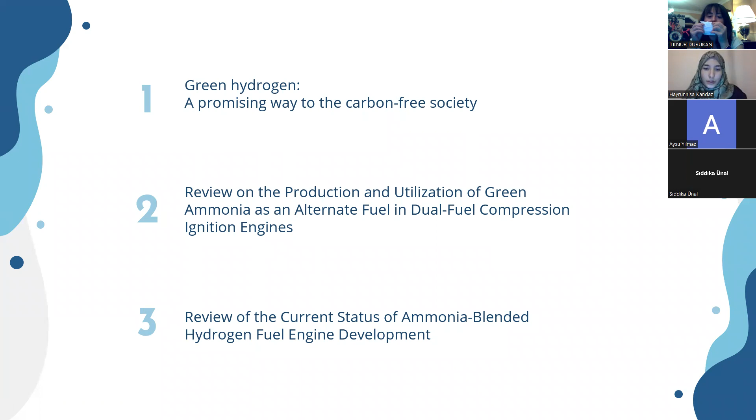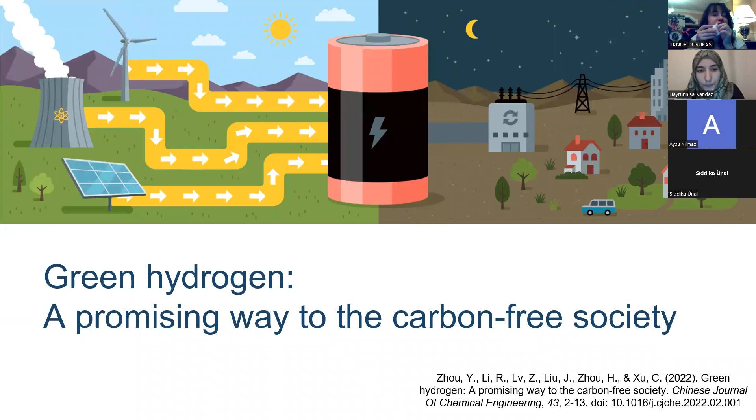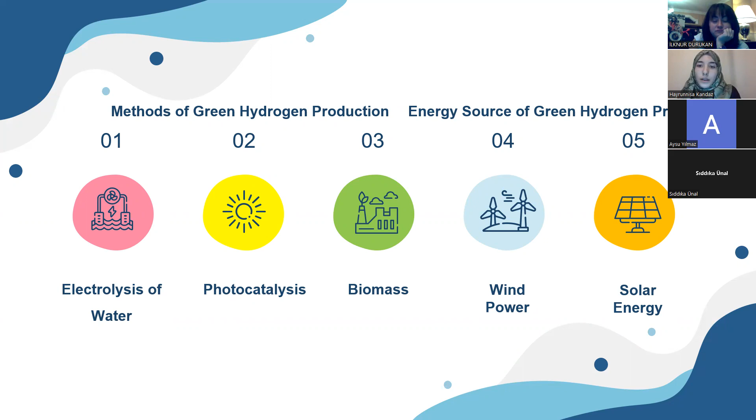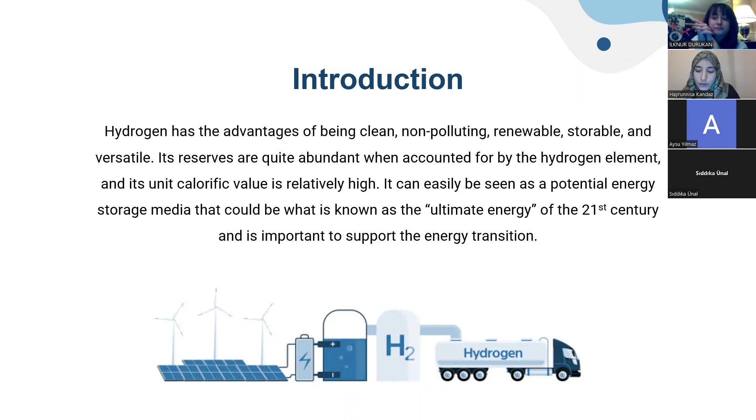We begin with green hydrogen, a promising way to the carbon-free society article. Green hydrogen production methods include electrolysis of water, photocatalysis, and biomass. The energy source of green hydrogen production is mainly wind power and solar energy. Hydrogen has the advantages of being clean, non-polluting, renewable, storable, and versatile. Its reserves are quite abundant when accounted for by the hydrogen element, and its unit calorific value is relatively high. It can easily be seen as a potential energy storage media that could be what is known as the ultimate energy of the 21st century, and it's important to support the energy transition. In view of the different hydrogen production pathways, hydrogen source can be divided into gray hydrogen, blue hydrogen, and green hydrogen.

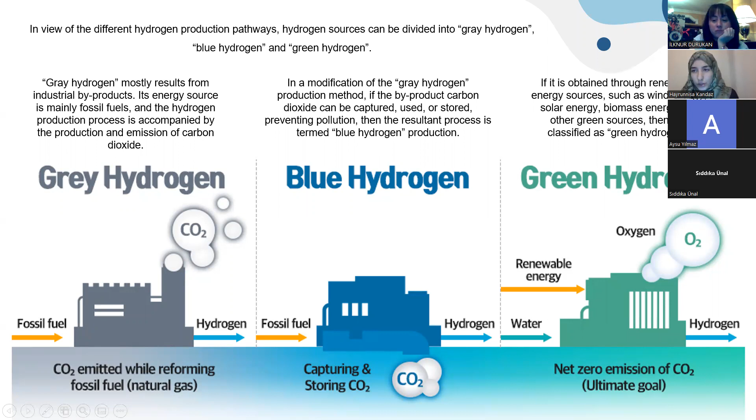Gray hydrogen mostly results from industrial byproducts. Its energy source is mainly fossil fuels, and the hydrogen production process is accompanied by the production and emission of carbon dioxide. In a modification of the gray hydrogen production method, if the byproduct carbon dioxide can be captured, used, or stored, preventing pollution, then the resultant process is termed blue hydrogen production. If it's obtained through renewable energy sources such as wind energy, solar energy, biomass energy, and other green sources, then it's classified as green hydrogen. The electricity in the electrolysis process has great potential to be driven by renewable energy and obtained through low carbon or carbon-free methods. Therefore, this technology is considered to be the most promising green hydrogen production technology.

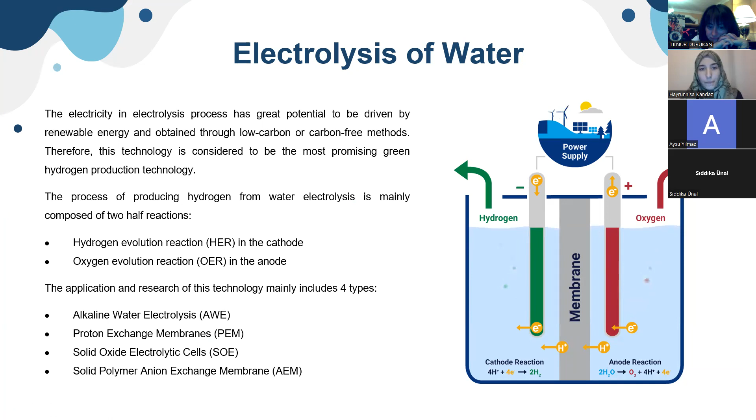The process of producing hydrogen from water electrolysis is mainly composed of 2 half reactions: the hydrogen evolution reaction at the cathode, as you can see in the figure, and the oxygen evolution reaction at the anode. The application and research of this technology mainly includes 4 types: alkaline water electrolysis, proton exchange membranes, solid oxide electrolytic cells, and solid polymer anion exchange membrane. Let's take a look at these types of technologies and their differences in a video.

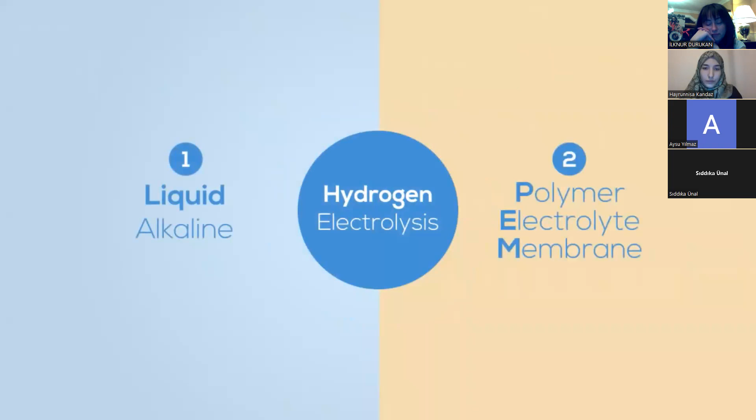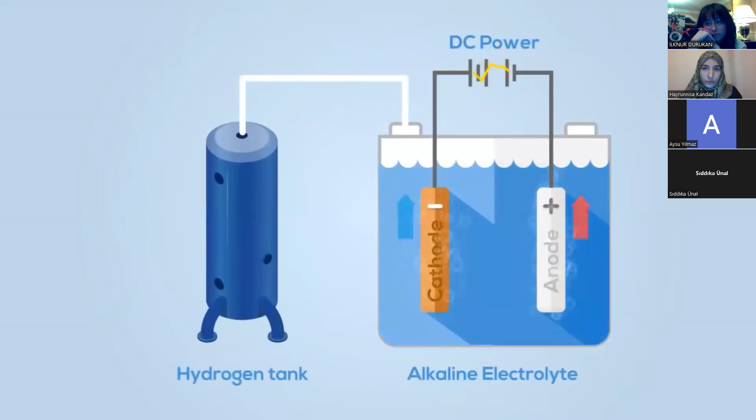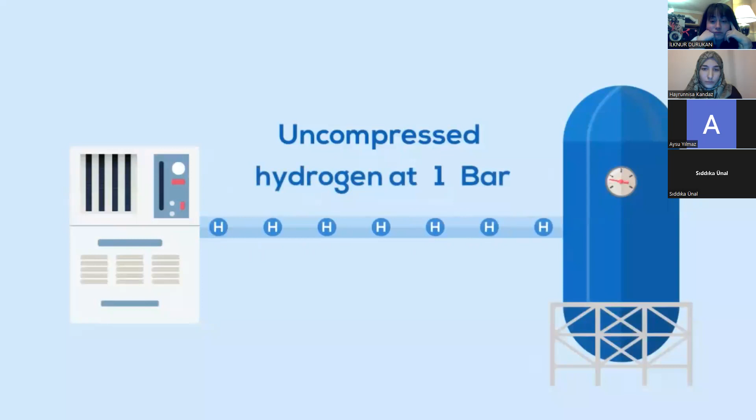Hydrogen electrolysis from water is usually undertaken with liquid alkaline or polymer electrolyte membrane electrolyzers. The alkaline electrolyzer works by immersing 2 electrodes in a liquid electrolyte. When a voltage is applied, the product gases are released, in this case oxygen and hydrogen. However, it does pose some problems. It is unable to make efficient use of intermittent power supplies, meaning it's incompatible with renewables. It also compromises efficiency during storage. To store enough hydrogen for regular use, you would need either a giant tank or an additional compressor.

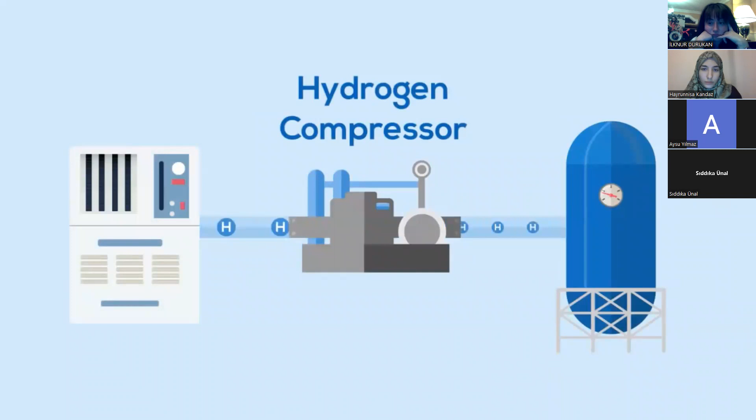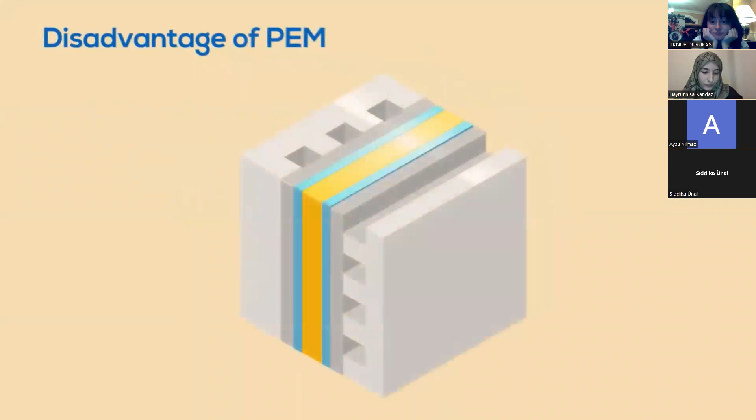The PEM electrolyzer overcomes some of these issues by using a solid polymer electrolyte, which is the membrane responsible for the conduction of protons, the separation of hydrogen and oxygen, and the electrical insulation of the electrodes. It's able to make use of the fluctuating power supply from renewables and results in pure hydrogen due to the solid structure of the electrolyte. It is easy and more efficient. However, it has a prohibitively high cost due to its required use of gold, iridium, and platinum.

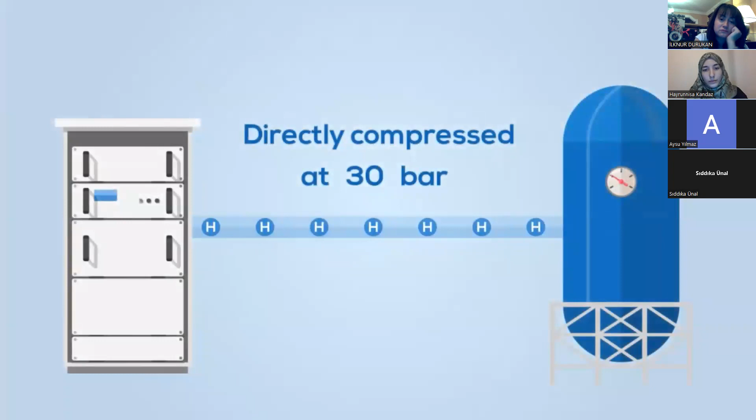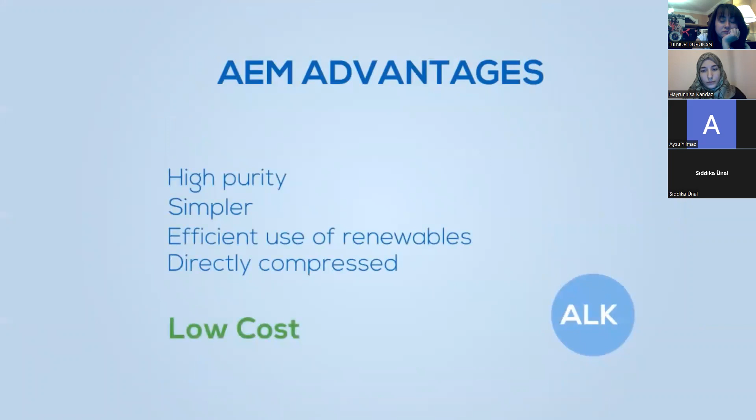Fortunately, a new type of electrolyzer, the anion exchange membrane, or AEM electrolyzer, provides a solution to all of these problems. It uses an alkaline solid polymeric membrane, eliminating the need for rare and expensive noble metal catalysts. The AEM electrolyzer is a simpler and more efficient system that produces directly compressed hydrogen. It's the key technology that enables lower overall costs. The AEM electrolyzer combines the benefits of the PEM electrolyzer with the cost of an alkaline system. It's an important breakthrough which will enable the economical adoption of hydrogen energy storage systems all over the world.

Then let's look in detail at all of the electrolysis methods. First, we begin with alkaline water electrolysis. The AWE technology covers the earliest industrialization time, reliable technology, low cost, and easy operation, but the device occupies a large area. At present, the device for alkaline water electrolysis technology is mainly composed of an electrolyzer, electrolyte, diaphragm, cathode, and anode. Diaphragm means membrane. Generally it has a low working temperature, and the diaphragm is generally made of asbestos. It is necessary to balance the pressure of the cathode and anode during operation to avoid explosion caused by the interpenetration of hydrogen or oxygen.

Since the electrolyzer for alkaline water electrolysis is slow to start and requires long response time, we see in the video that the method of increasing the conversion rate can be achieved by increasing the current intensity or reducing the voltage.

In AWE technology, the choice of electrolyte and the quality of the diaphragm have a decisive influence on the efficiency of hydrogen production. The effect of electrolyte concentration on the electrolysis efficiency is significant.

In the development process, asbestos, which was used as a diaphragm in the early stage, was replaced due to its poor corrosion resistance.

Composite diaphragms formed by the cross-linking of high molecular polymers and specific inorganic materials have already been developed. However, they still need to be optimized.

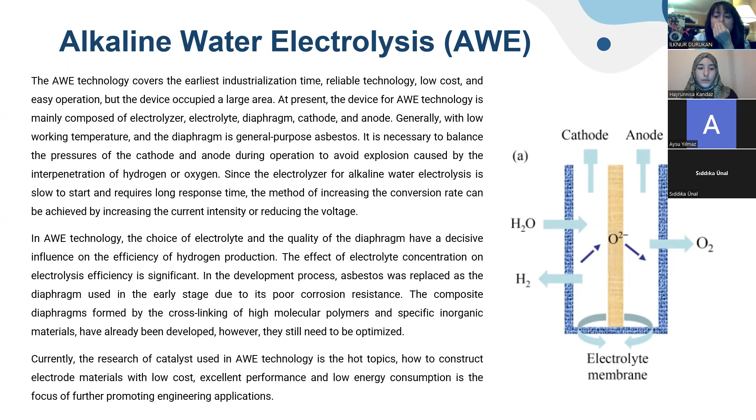Currently, the research of catalysts used in AWE technology is a hot topic: how to construct electrode materials with low cost, excellent performance, and low energy consumption is the focus of further promoting engineering applications.

AWE technology has been widely used in industries such as pharmaceuticals, energy storage, and metallurgy. These processes are represented by some research and development institutions.

Some countries are most important for research and development, such as China, America, Norway, Belgium, and Italy.

Proton exchange membrane, PEM, technology is easy to integrate and has high conversion efficiency, but the cost is very high. The catalyst cost is one of the big reasons preventing this technology from being applied at large scale.

Due to the small size of the electrolytic cell, it is easy to couple PEM with wind energy and photovoltaics, so this technology is applicable in the future.

For PEM technology, the main device is still an electrolytic cell, but the core part becomes a polymer cation exchange membrane. The cathode and anode catalysts are attached to this membrane, and the bipolar plate is responsible for the connection of multiple membrane electrodes.

The advantage of PEM technology is that it can achieve single conductivity of hydrogen ions, giving it higher safety. In addition, the construction of the electrolytic cell is compact and the electrode does not corrode the device.

The research focused on the influence of different proton exchange membranes on the performance of the PEM electrolytic cell and the development of new membrane materials.

The development of PEM technology originated from the needs of US military oxygen generators. Because of the problem of consuming renewable energy, European and American countries are actively promoting the advancement of the PEM process.

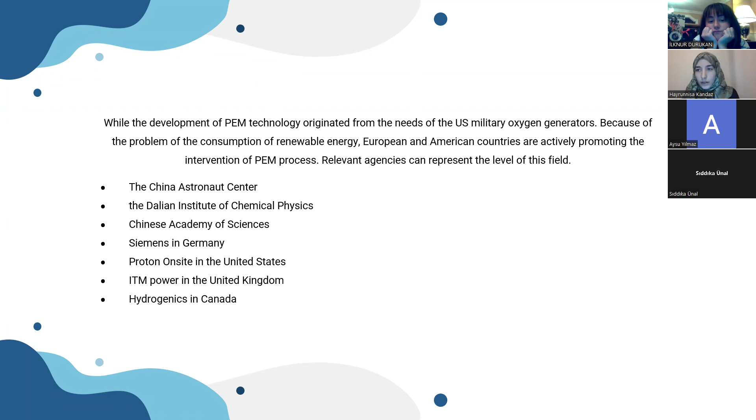Solid oxide electrolytic cell, SOE, technology is subject to certain restrictions due to the high temperature required as the working condition. The SOE technology requires a high temperature reaction site.

A nickel-based porous cermet is used as the cathode, and the anode is a perovskite oxide of rare earth elements, while the electrolyte layer usually acts as an oxygen ion conductor.

Due to the high operation temperature, the standard for the materials of the internal devices is relatively high. SOE technology has the advantage of flexible coupling with renewable energy.

Some institutions have carried out the optimization of solid oxide stacks and the design and operation of high temperature electrolytic cells. For SOE technology, in addition to stability under high temperature conditions, the anode material also needs to have compatibility with the electrolyte material.

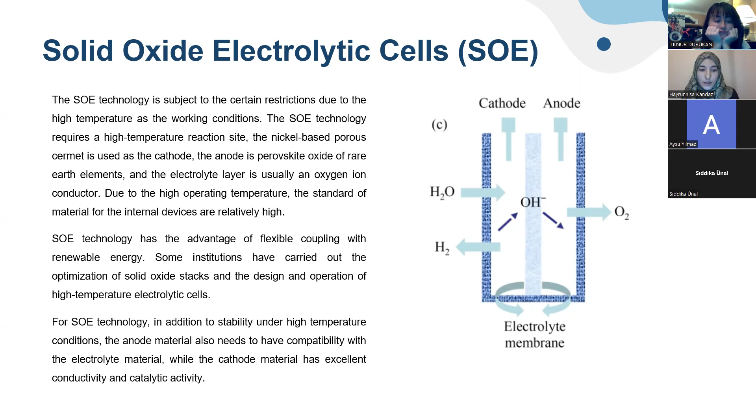The cathode material also needs excellent conductivity and catalytic activity.

This process is represented by some research and development institutions in the United States, Germany, France, and China.

After a series of research, the current problems that need to be solved in this technology mainly concern the poisoning of electrode materials and the high internal resistance in its long-term operation.

Solid polymer anion exchange membrane, AEM, technology is still in the research phase in terms of high temperature working conditions. The AEM technology uses an anion exchange membrane with low working temperature, fast startup, and non-corrosive reaction medium.

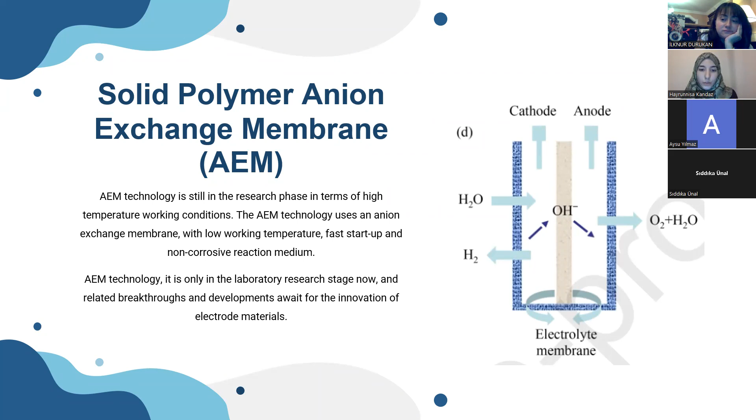AEM technology is only in the laboratory research stage now, and related breakthroughs and developments await the innovation of the electrode materials.

Regarding the operating parameters of the technologies, we can see the four technologies compared by electrolyte membrane, current density, required temperature, hydrogen purity, relative equipment volume, operating characteristics, maintainability, environmental protection, and technology maturity.

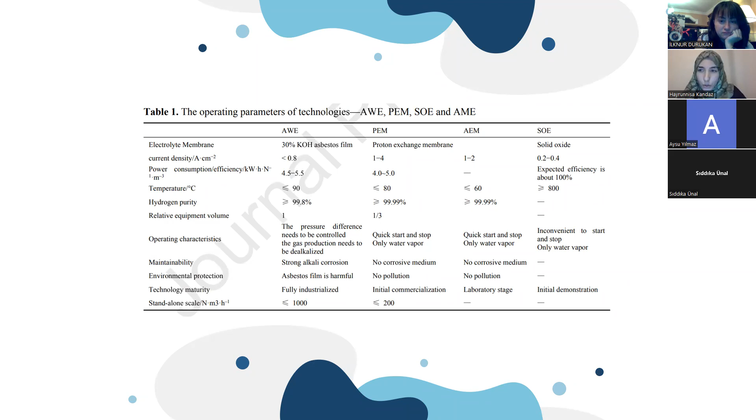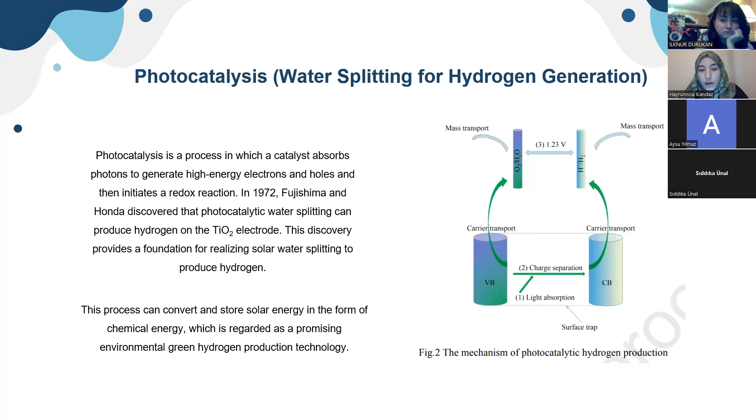Photocatalysis: water splitting for hydrogen generation. Photocatalysis is a process in which a catalyst absorbs photons to generate high energy electrons and holes and then initiates a redox reaction. In 1972, Fujishima and Honda discovered that photocatalytic water splitting can produce hydrogen on a titanium oxide electrode. This discovery provides a foundation for realizing solar water splitting to produce hydrogen. This process can convert and store solar energy in the form of chemical energy, which is regarded as a promising environmental green hydrogen production technology.

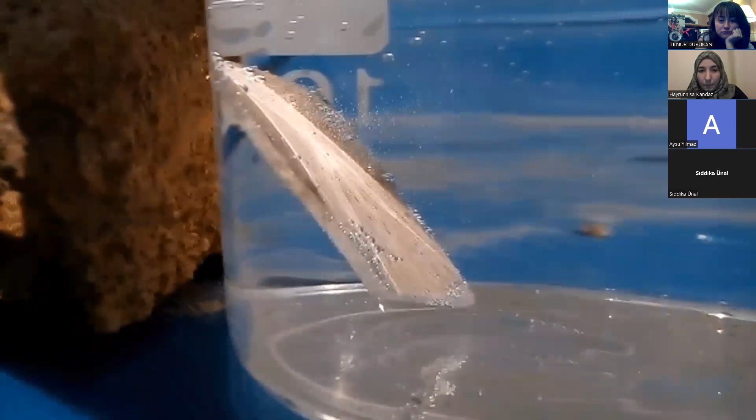Korean researchers have developed a catalyst system that can increase efficiency and reduce the cost of hydrogen production. Let's watch this news about how Korean materials scientists developed a new material to produce hydrogen by the photocatalytic method in 2019.

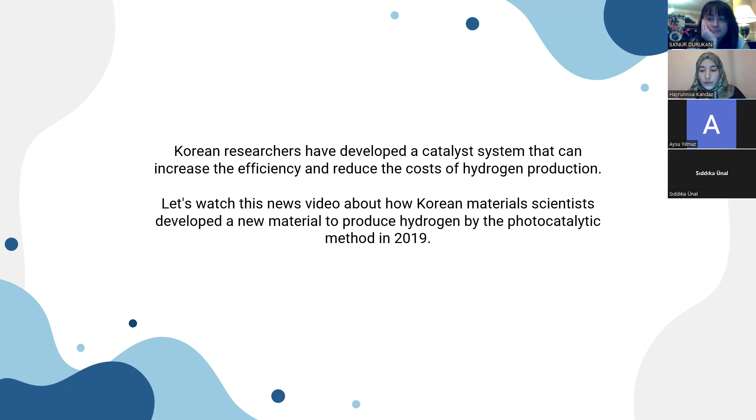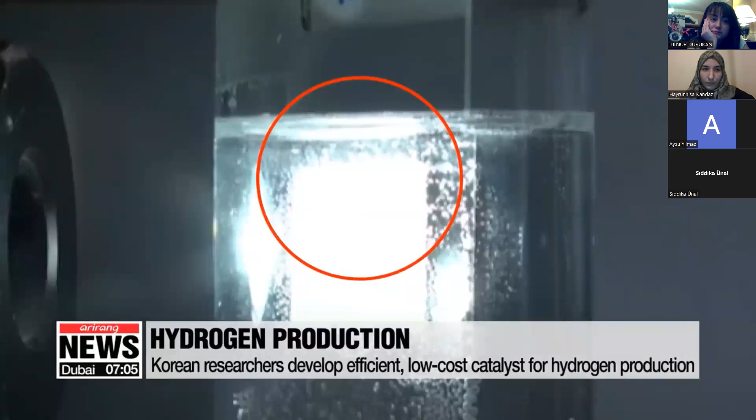Shining light at the beaker of water creates tiny bubbles. The film-like solid catalyst developed by Korean researchers uses regular light to convert water into hydrogen. The catalyst turns black during the reaction and then returns to its original white color, which means it can be reused multiple times.

We observed that hydrogen was created for a period of 48 hours in light. Hydrogen output stayed the same, so we believe the technology can be used for a long time without the catalyst losing performance. Under good lighting, a gram of the material used in the catalyst can create 30 milligrams of hydrogen per hour. The new catalyst is 50% more efficient than existing systems.

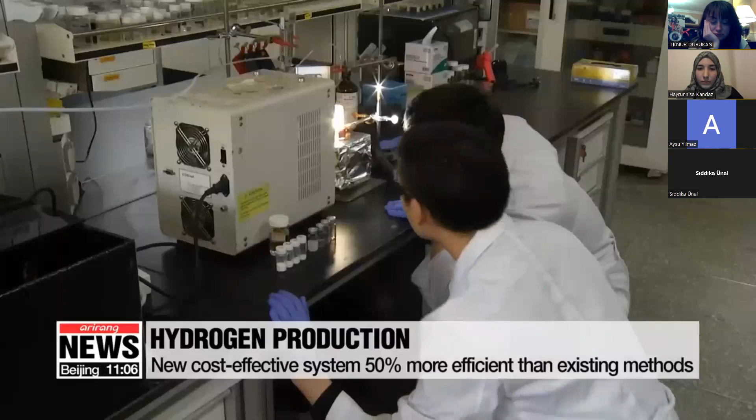And because it's made of copper instead of expensive platinum, it's much more cost-effective. Also, retrieving hydrogen from water using light does not produce any harmful byproducts.

At present, most hydrogen is made through a methane reformation technique. This is energy intensive and generates a lot of byproducts like greenhouse gases. The new technology only produces hydrogen.

Biomass. Using biomass as raw material through gasification, conversion, decarbonization, and separation, pure hydrogen is obtained finally. Because in green hydrogen production, storage and transportation occupy a high proportion, which is the main obstacle to opening up green hydrogen energy in the energy system. Hydrogen production by biomass is expected to overcome these two major problems: storage and transportation problems of green hydrogen sources, and hydrogen storage and transportation cost.

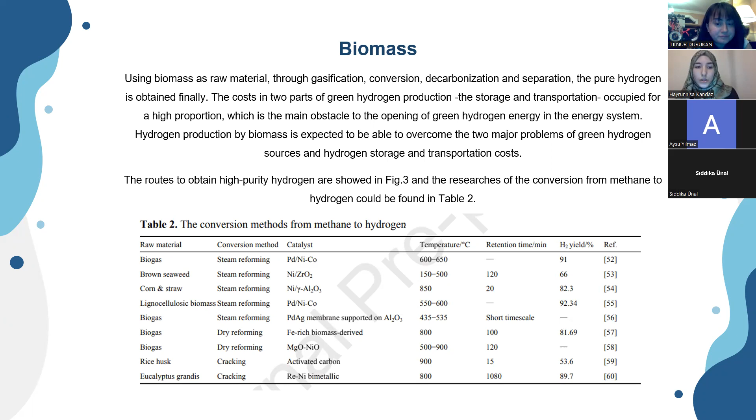The routes to obtain high purity hydrogen are shown in figure 3, and this research on the conversion from methane to hydrogen could be found in table 2. You can see the conversion methods from methane to hydrogen, and we see in the figure, biomass feedstock.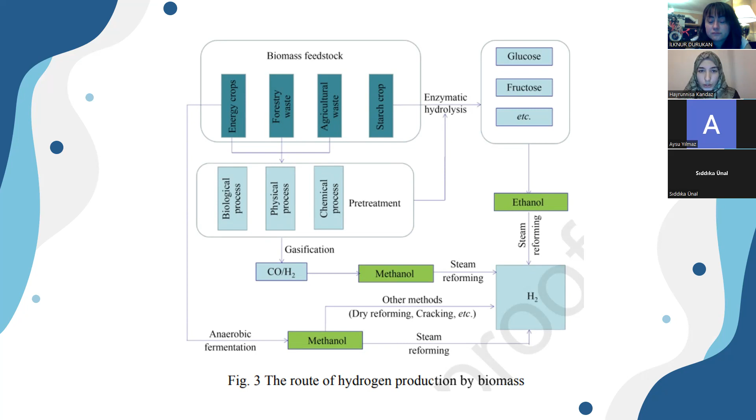Biological hydrogen production and thermochemical hydrogen production are two pathways for hydrogen production by biomass. Biological ways show hydrogen-producing microorganisms such as anaerobic fermentation hydrogen production and photosynthetic hydrogen production, but the yield and stability are poor, and the possibility of large-scale production is limited.

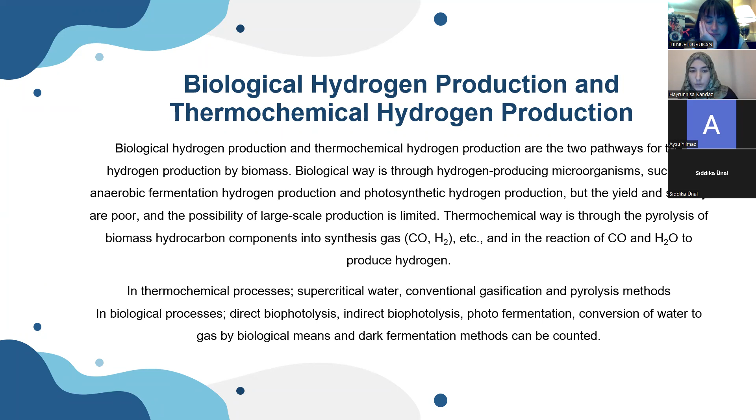Thermochemical ways show the pyrolysis of biomass hydrocarbon components into synthesis gas, carbon monoxide, and hydrogen, and in the reaction of carbon monoxide and water, hydrogen is produced. In thermochemical processes, supercritical water gasification, conventional gasification, and pyrolysis methods are used. In biological processes, direct biophotolysis, indirect biophotolysis, photofermentation, conversion of water to gas by biological means, and dark fermentation methods can be counted.

Supercritical water gasification uses the dissolving ability of supercritical water to dissolve various organic substances in biomass to produce a high density, low viscosity liquid, which could be quickly vaporized under high temperature and high pressure conditions to produce mixed gas rich in hydrogen.

Compared with other biomass thermochemical hydrogen production technologies, supercritical water gasification has unique advantages. Without a high energy consuming drying process, it can directly gasify wet organisms with high water content and will not cause secondary pollution. In addition, the heat from the produced high pressure hydrogen can be directly used for combustion engines or turbines to obtain electricity.

Although supercritical water gasification is a promising biomass fuel conversion technology, the application of this technology on an industrial scale still has some limitations. On one hand, currently only a few researchers have the opportunity to use short residence time continuous flow tube reactors or continuous stirred tank reactors for supercritical water gasification experiments. On the other hand, current research hotspots on supercritical water gasification hydrogen production technology mainly focus on the influence of different types of biomass compounds on hydrogen production yield.

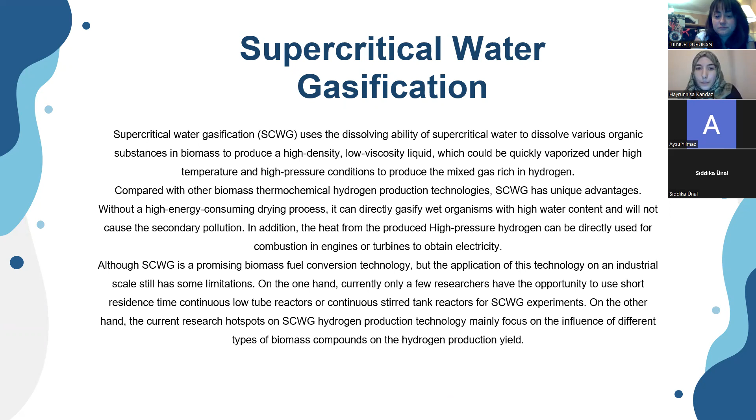Since the carbon dioxide that comes out as a result of burning organic materials was previously taken from the atmosphere during the formation of these materials, the environment will be protected in terms of carbon dioxide emissions during the production of energy from biomass.

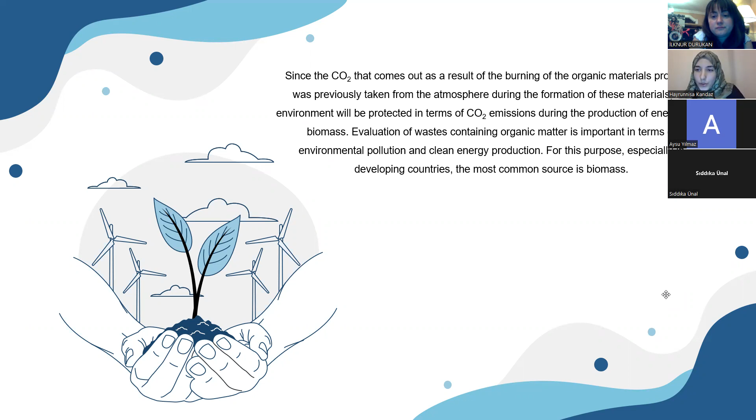Evaluation of wastes containing organic matter is important in terms of environmental pollution and clean energy production. For this purpose, especially in developing countries, the most common source is biomass. Approximately 15% of world energy consumption and 43% of energy consumption in developing countries are provided from biomass.

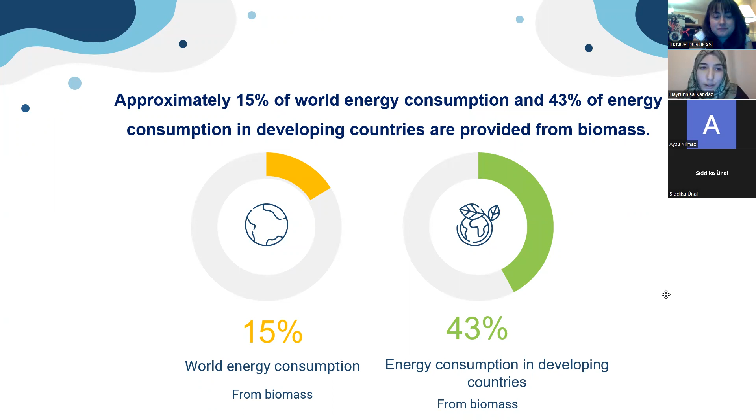Energy source of green hydrogen production: wind power. The hydrogen production project by wind power was first proposed by the United States, which produced hydrogen through a generator connected to an electrolysis reactor. The National Renewable Energy Laboratory in the US and Xcel Energy launched the wind-to-hydrogen demonstration project in 2004, which uses wind power and photovoltaic power to produce and store hydrogen, maximizing the use of renewable energy and optimizing the energy transfer. After the US, Japan also proposed a series of plans and applications for hydrogen production from wind power.

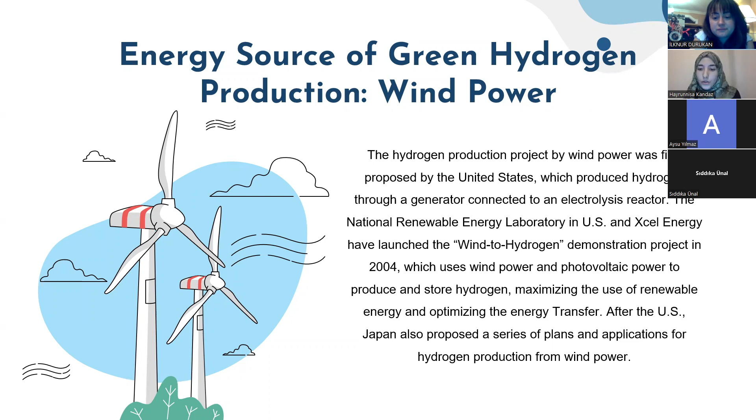Green hydrogen is produced using renewable energy in this project. In recent years, there has been a lot of theoretical and technical research on hydrogen production technology by wind power generation. For example, a coordinated control method is developed for hydrogen production technology by wind power generation, in which variable speed wind turbines and hydrogen production devices are installed together. The power curve is smoothed to reduce the impact of wind energy fluctuations on the power system and hydrogen production equipment. After that, the system is introduced and simulated in detail, and its performance is evaluated.

The influence of the operating temperature of the electrolyzer on the hydrogen production system in wind power generation was analyzed. The production efficiency at the actual working temperature is compared with the production efficiency at the rated temperature, and the result shows that the hydrogen production efficiency at the actual temperature is overestimated. A wind power plant for hydrogen production by electrolyzers was simulated, and two methods were proposed for optimizing the total power of hydrogen production by wind power. The coupled operation of electrolyzer and wind turbines was studied, comparing the operating performance of four types of electrolyzer.

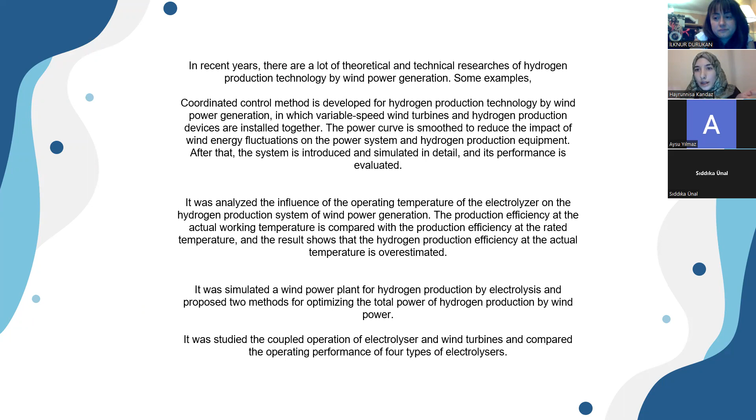Wind power is one of the ways of green hydrogen production technology. Wind energy is converted into electrical energy through wind generators, and then hydrogen is produced by electrolysis of water and passed through the hydrogen transmission system to achieve the terminal utilization, completing the wind energy converting to hydrogen energy.

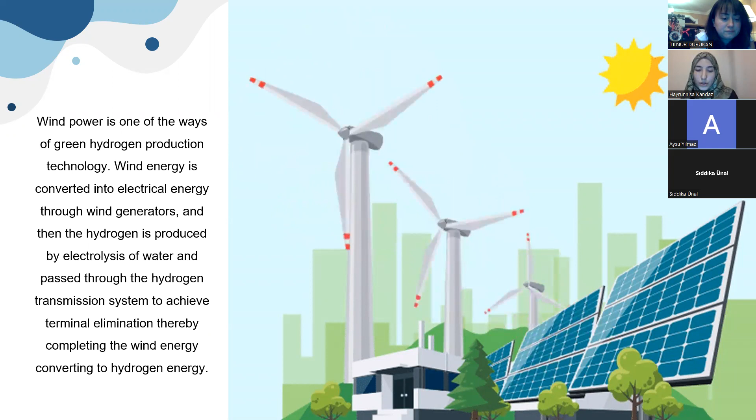According to the way of connecting to the grid, hydrogen production technology can be divided into three types. The grid connection system connects wind turbines to the grid, obtains electricity from the grid, and produces hydrogen by electrolyzing water. This method is mainly used for wind consumption and energy storage of large-scale wind sites, with routes shown in figure 4. For off-grid systems, the electrical energy is produced by a single fan or multiple fans, which is directly provided to the electrolysis equipment without going through the grid for hydrogen production.

The grid-connected without transmission system is the way to connect the wind turbines with the grid, but the electricity is not transmitted to other sites, only meeting the demand for hydrogen production locally.

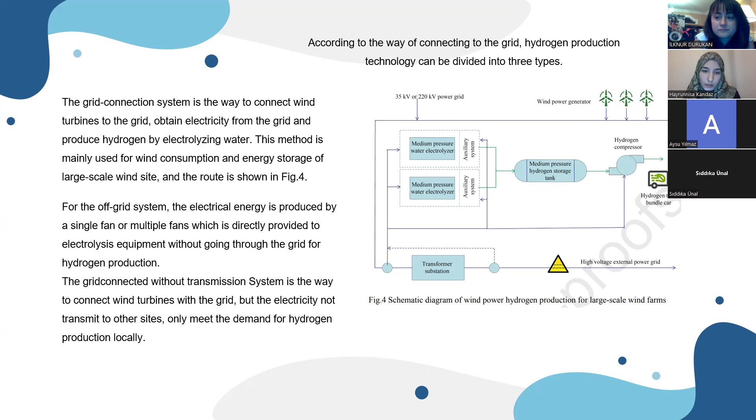Energy source of green hydrogen production, wind power, Table 3. Table 3 shows the economic data of hydrogen production using wind power as the energy source. The survey from different countries shows that it's economically feasible to use wind energy to generate hydrogen to a certain degree.

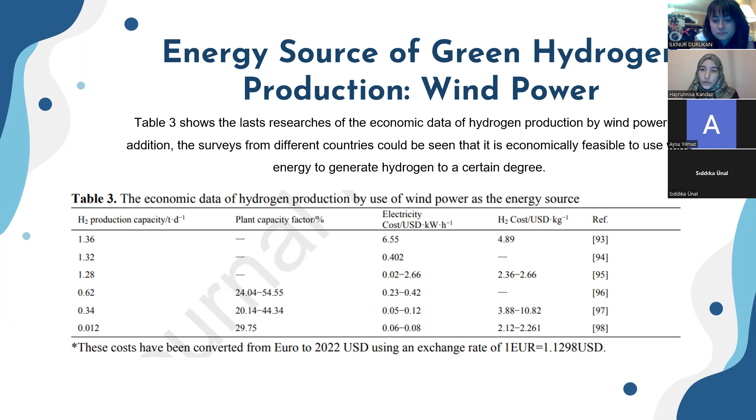Solar energy. The solar hydrogen production system by photovoltaic-water electrolysis can be divided into direct coupling and indirect connection according to the connection mode between the solar photovoltaic panel and the water electrolysis cell. The direct coupling system is achieved through optimal structure matching between the photovoltaic array and the water electrolyzer, without the maximum power point tracking controller, direct current controller, and storage battery, etc., making the system more economical and efficient.

Indirect connection is the method used by most photovoltaic water electrolyzer hydrogen production systems, which is composed of photovoltaic modules, control modules, batteries, and a hydrogen energy storage system. Because the system requires electronic equipment such as MPPT and DC-DC controllers, it not only increases the system cost, but also causes power transmission loss, reducing system efficiency.

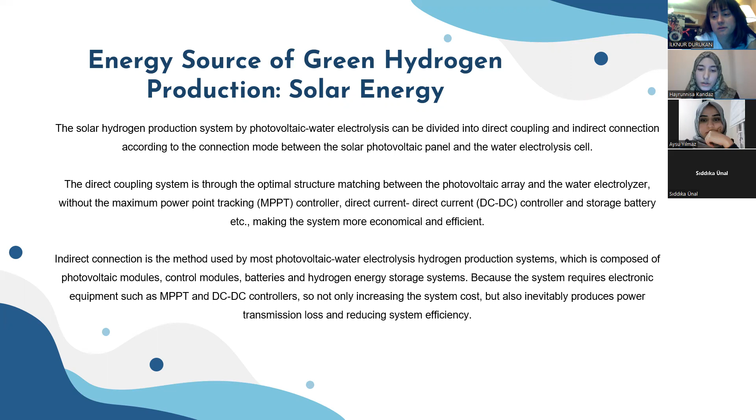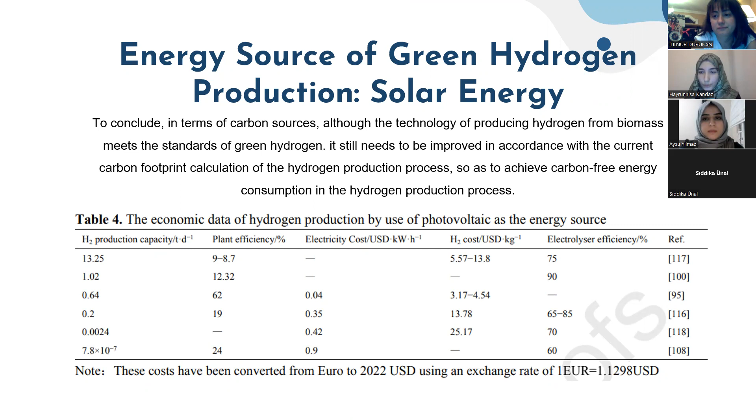To conclude, in terms of carbon sources, although the technology of producing hydrogen from biomass meets the standards of green hydrogen, it still needs to be improved in accordance with the current carbon footprint calculation of the hydrogen production process, so as to achieve carbon-free energy consumption in the hydrogen production process. You can see the economic data of hydrogen production by use of photovoltaic as the energy source, and their efficiency also, and their costs.

Conclusion. In the current global energy strategy, the green hydrogen industry is crucial in the development of low-carbon energy. The cost of hydrogen production from traditional fossil energy will gradually rise with the increase of carbon tax and discouragement of the carbon emissions, while the cost of green hydrogen obtained from renewable energy will also gradually decrease with the improvement of technology and the industry in this side.

At present, the most promising hydrogen production technology involves the electrolysis of water. In addition, hydrogen production fueled by renewable energy, wind and solar energy, and biomass are also potential approaches in the zero carbon pathway.

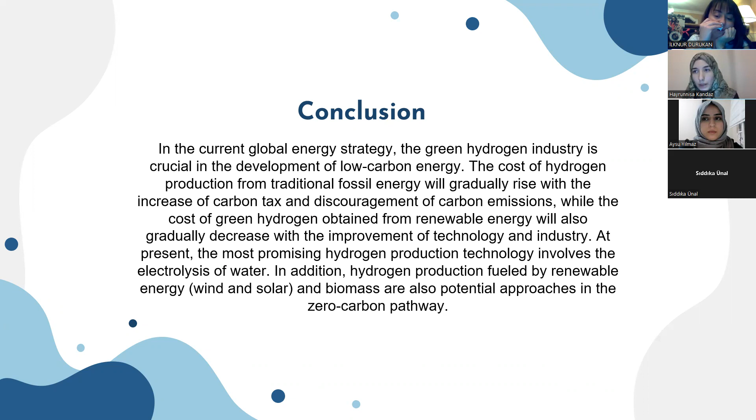Review on the production and utilization of green ammonia as an alternate fuel in dual-fuel compression ignition engines. Prospects for hydrogen, a carbonless fuel, face limitations in developing the necessary infrastructure as well as challenges associated with its storage and distribution. Ammonia has been identified as a potential facilitator for a well-established carbon-neutral economy and can also serve as a hydrogen energy carrier thanks to its higher gravimetric hydrogen density.

This article provides a detailed literature review highlighting the challenges and strategies for using ammonia as a fuel for compression ignition engines in dual-fuel combustion mode with secondary fuels such as diesel, dimethyl ether, kerosene, hydrogen, and other alternative fuels.

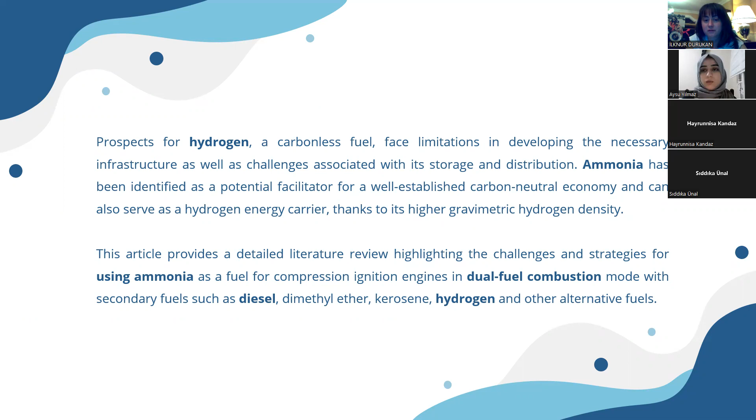Introduction. Hydrogen has been recognized as one of the most promising clean energy carriers that are sustainable and have the potential to contribute to the decarbonization of the automotive and power generation industries. However, the direct use of hydrogen as a transportation fuel faces several safety and storage challenges due to its physicochemical properties such as its boiling point and flammability range.

Liquid hydrogen storage systems using cryogenic tanks are an alternative technique for storing hydrogen under ambient pressure conditions, but the low energy efficiency of the liquefaction process and boiling of hydrogen from cryogenic containers limit the application of this storage method.

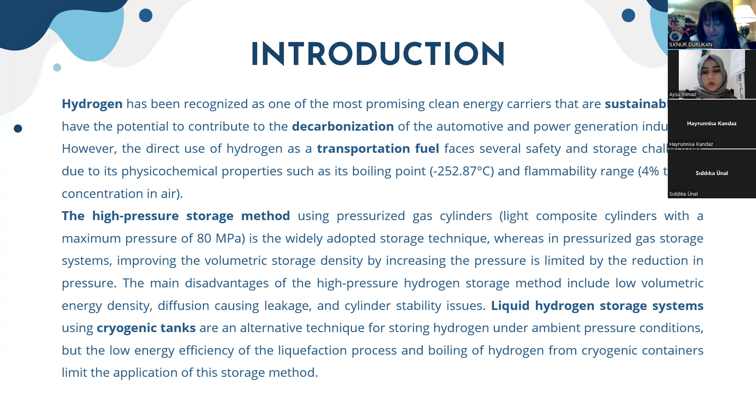The difficulties associated with the storage and transportation of hydrogen due to its low density can be overcome using hydrogen energy carriers such as ammonia and brown gas, whose indirect use is highly energy efficient compared to liquid or compressed hydrogen at high pressure. Ammonia is a carbonless fuel with a hydrogen content of 17.6% by weight and can be stored at 25 degrees. Ammonia also has an established production and distribution network as it is widely used in agriculture and industrial applications.

Chemical conversion techniques to produce hydrogen fuel from ammonia have limitations in efficiency and economy compared to direct ammonia combustion. A major challenge in the development and optimization of the automotive ammonia fuel cycle is the limited data available on the performance of ammonia-fueled engines. Few studies have explored the possibility of introducing pure ammonia fuel into an engine.

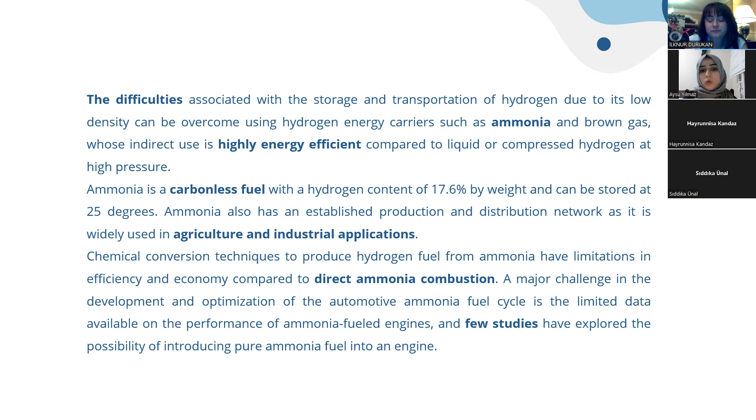Ammonia, green hydrogen carrier. The isolation of gaseous ammonia was first done in 1774 by Joseph Priestley. Frank and Caro discovered the cyanamide process for ammonia synthesis in 1898, wherein nitrogen fixation is effectively accomplished using calcium carbide and formed calcium cyanamide. However, the higher energy requirements for the cyanamide process have limited its applicability on a commercial scale.

First, Haber carried out the synthesis of ammonia from its elements in 1908. This is one of the important discoveries that formed the basis of the modern ammonia industry and was awarded the Nobel Prize in Chemistry. Haber's patent rights were acquired by BASF and the first ammonia plant based on the Haber-Bosch process started operating in Oppau, Germany on September 9, 1913. The processes involved in the production of ammonia from conventional and renewable energy sources are shown in the diagram.

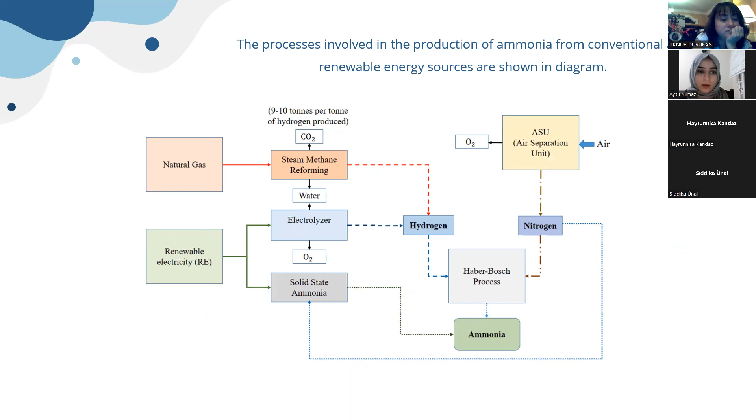70% of global ammonia production follows the Haber-Bosch process, where hydrogen and nitrogen react in an exothermic process. For the Haber-Bosch process, hydrogen is produced using steam methane reforming or water-based electrolysis. The carbon footprint of the steam methane reforming Haber-Bosch process showed that for every ton of ammonia produced, 2.16 tons of carbon dioxide is released. Water electrolyzers using renewable energy sources will enable the production of green ammonia, as methane-based systems cause carbon emissions.

Solid-state ammonia synthesis is an alternative energy-efficient method for ammonia production that uses an electrochemical process with nitrogen, water, and electricity to produce ammonia. The energy consumed in the SSAS process is approximately 60% of the Haber-Bosch process.

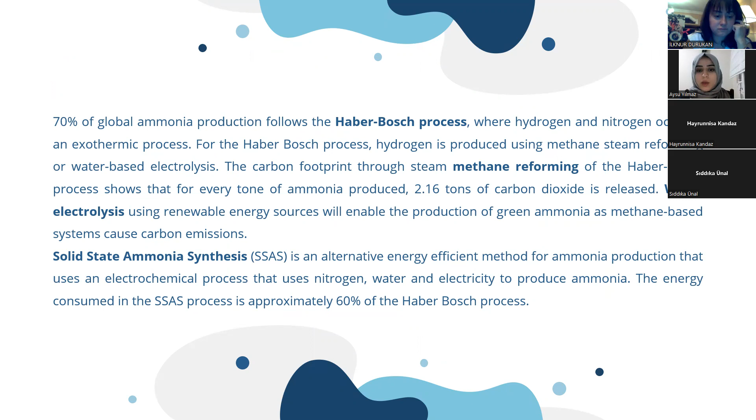Green ammonia production techno-economic feasibility. Ammonia can be classified into 3 types: brown ammonia, blue ammonia, and green ammonia, according to synthesis process and carbon footprint. Ammonia synthesized using carbon-based raw materials such as methane, naphtha, and coal is called brown ammonia, and blue ammonia refers to that synthesized using similar raw materials, but with a lower carbon footprint compared to brown ammonia with the help of suitable carbon capture. Ammonia synthesized by following a carbon-free route is called green ammonia with zero carbon footprint, using renewable energy sources for water electrolysis, electrochemical reduction, or photocatalytic reduction.

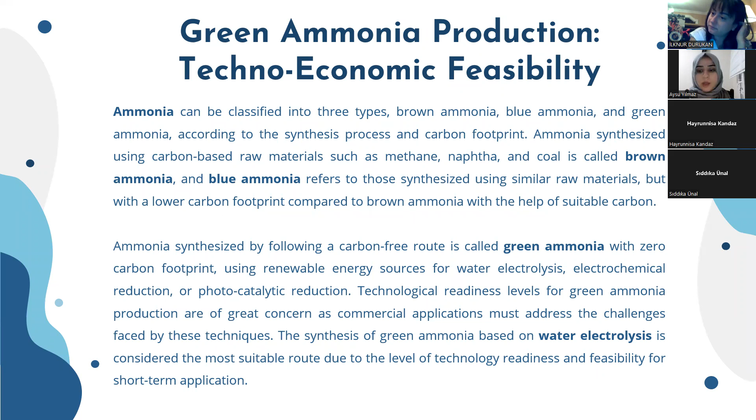Technological readiness levels for green ammonia production are of great concern as commercial applications must address the challenges faced by these techniques. The synthesis of green ammonia based on water electrolysis is considered the most suitable route due to its level of technology readiness and feasibility for short-term application. Some of the key drivers and risks involved in the large-scale implementation of green ammonia production and use are addressed from economic, technical, and political aspects. Some green ammonia synthesis techniques with reasonable technology readiness level include electrolysis and biomass gasification, while other techniques in the early stage of demonstration and development are shown in the figure.

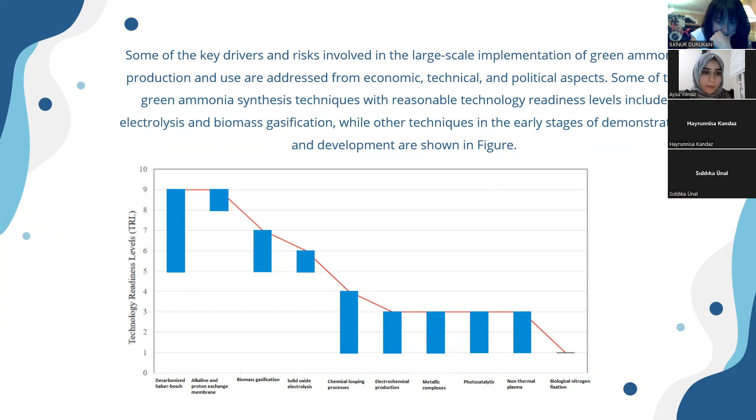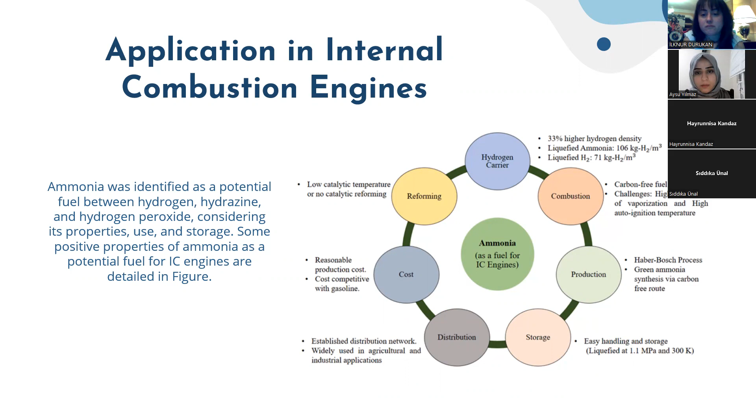Application in internal combustion engines. Ammonia was identified as a potential fuel among hydrogen, hydrazine, and hydrogen peroxide, considering its properties, use, and storage. Some positive properties of ammonia as a potential fuel for IC engines are detailed in the figure. Its injection as a liquid fuel means a higher amount of energy is consumed for the operation of ammonia. Research on the use of ammonia as a fuel in internal combustion engines was carried out in 2 stages for different purposes. The first phase was conducted from the 1960s to the 1970s after the Second World War, with the goal of meeting the oil crisis and logistic issues. The second phase of ammonia fuel research started in this new millennium. The main goal was to reduce greenhouse gas emissions through the development of carbon-free fuels.

Ammonia's higher octane number and anti-knock properties make it a suitable fuel for spark ignition engines. The presence of an ignition source makes it easier to overcome the challenge of the higher auto-ignition temperature. The extremely low flame speed is an important problem that can be solved using fuel mixtures of ammonia and other compounds.

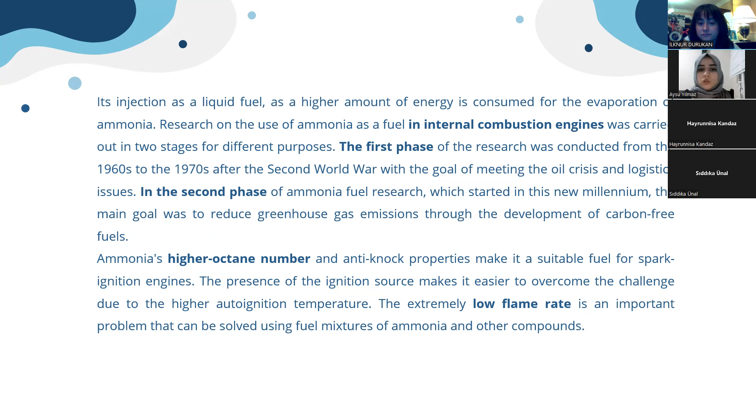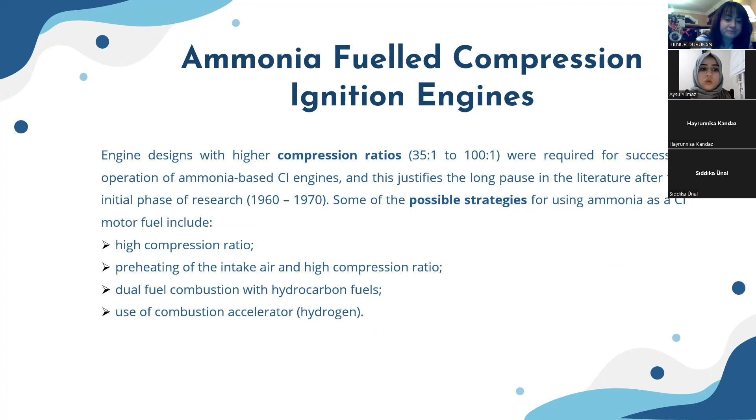Ammonia-fueled compression ignition engines. Engines designed with higher compression ratios were required for successful operation of ammonia-based CI engines, and this justifies the long pause in the literature after the initial phase of research. Some possible strategies for using ammonia as CI engine fuel include high compression ratio, preheating of the intake air with high compression ratio, dual fuel combustion with hydrocarbon fuels, and use of a combustion accelerator. Higher compression ratios are impractical in conventional engines, as the allowable compression ratio in real-world applications is in the 12:1 to 24:1 range. Working only as a single fuel in a compression ignition engine is very difficult for ammonia, as it would require a very high compression ratio. Successful engine operation with a 95% ammonia fuel fraction was achieved by Reiter and Kong. The ammonia fuel share trend tested by other researchers in previous studies is detailed in the figure.

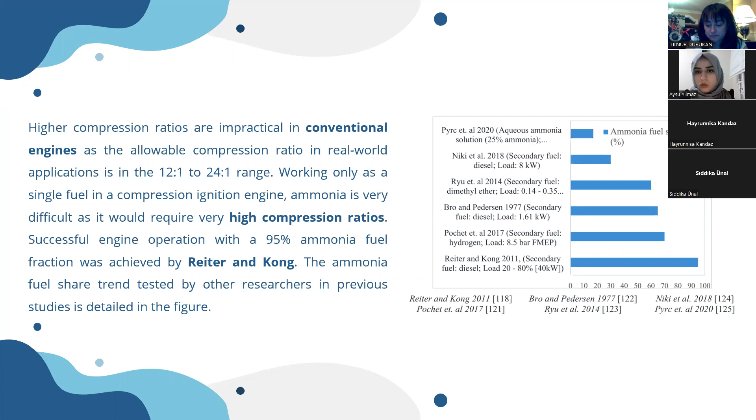Dual fuel combustion of ammonia. In the literature, it has been observed that the dual fuel approach with secondary fuels such as diesel, dimethyl ether, kerosene, and hydrogen is effective for ammonia combustion. The high autoignition temperature of ammonia necessitates combustion in dual fuel mode with secondary fuels for compression ignition engines. The literature showed that increasing the proportion of ammonia in the fuel mixture reduces carbon emissions but has a detrimental effect on engine performance due to the lower energy density and calorific value of ammonia. Future research directions include the application of ammonia in advanced compression ignition engines to achieve low temperature combustion mode, thanks to their lower emissions, higher thermal efficiency, and fuel flexibility.